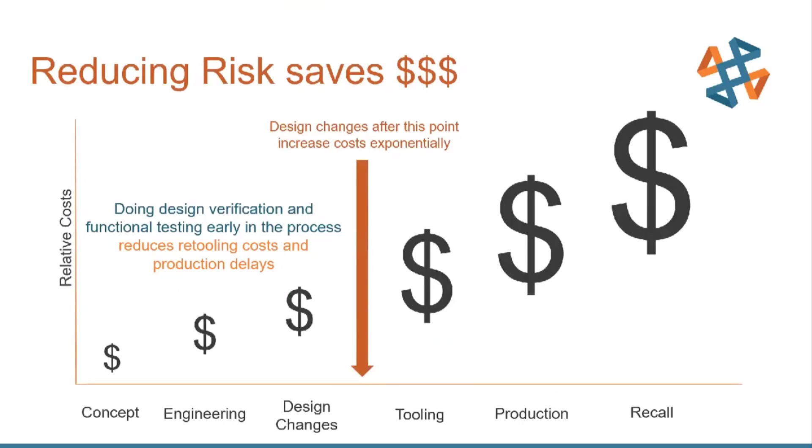CAD, or Center for Advanced Design, is a firm of design engineers specializing in creating complex surface geometry for the plastics industry. CAD's goal is saving time and avoiding mistakes, both of which saves money. They're using the Stratasys F370 to quickly make design changes and often print multiple iterations before any tooling cost is incurred.

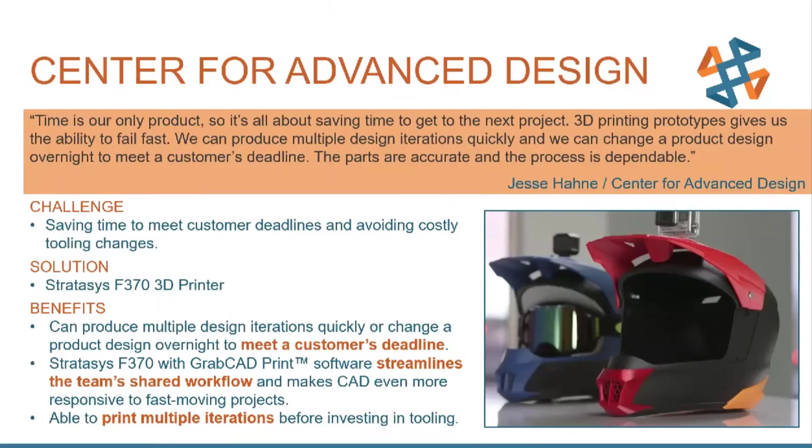See their motocross helmet, which is designed to attach a GoPro camera to the visor. OtterBox is the number one supplier of smartphone cases in the US. Their challenge is keeping up with the latest versions in the cell phone market. To keep up with the ever-changing consumer items, OtterBox uses the J750 3D printer to create the exact size, shape, and color of their designs.

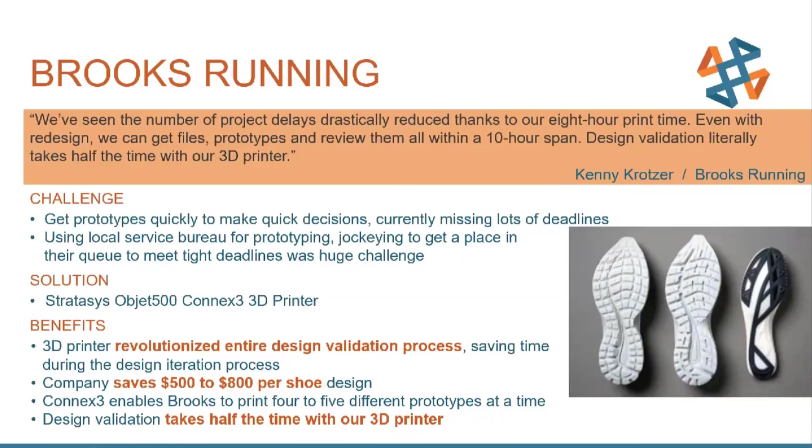Prototypes went from days to hours, enabling a 67% time to market savings. Brooks Running is a US-based footwear company using a Connex 3 PolyJet printer to validate design at half of the time. This increased pace saves $500 to $800 per shoe design. In the photo, you can see two shoes that look similar, but with different tread designs. 3D printing lets them evaluate multiple iterations very quickly.

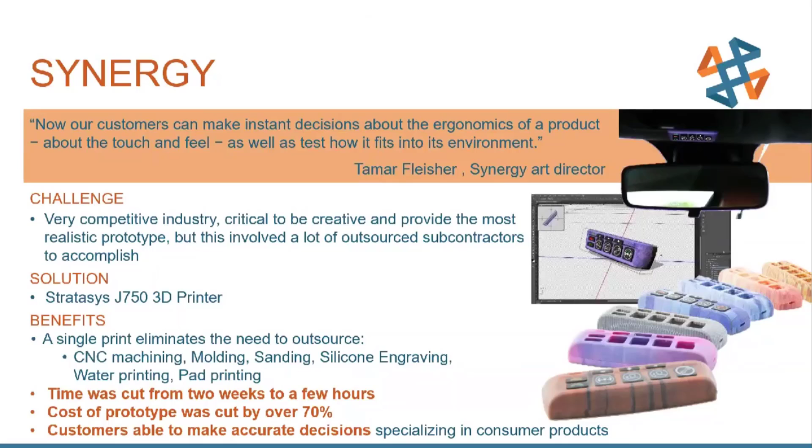Synergy is an R&D center for product development that specializes in consumer products, providing industrial design, engineering, and rapid prototyping services. The J750 meets all their needs of touch, feel, ergonomics, and environmental testing. Multiple machine operations are eliminated, from 2 weeks to a few hours, with a cost savings of 70%. Shown in the picture is the design for an automatic crash response system that can be customized for the car interior or customer preference. Let's look at a quick video of that.

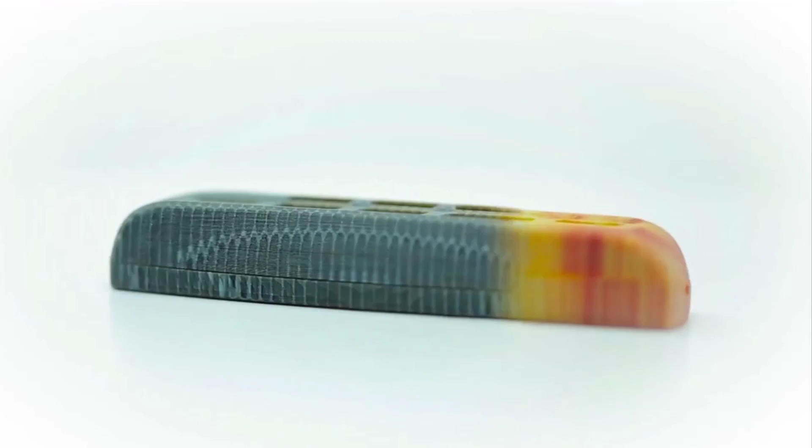Synergy is the R&D center for product development, industrial design services, engineering services, and rapid prototyping services. We specialize in consumer products. We really understand the process from the initial sketches to design to production. Each stage, we understand exactly what needs to be involved. The competition in product development and product design is very high today. To sell a consumer product, you need to be very smart on one hand, but on the other hand, you need to be very, very creative. The first time an entrepreneur sees his idea and feels it in his hand, it is a crucial moment. We need to give him the most realistic prototype.

Basically, to build a prototype like this takes a lot of time and a lot of subcontractors. But today, with the Stratasys J750, you can do everything on the spot. We designed an automatic crash response system, which is actually this control panel.

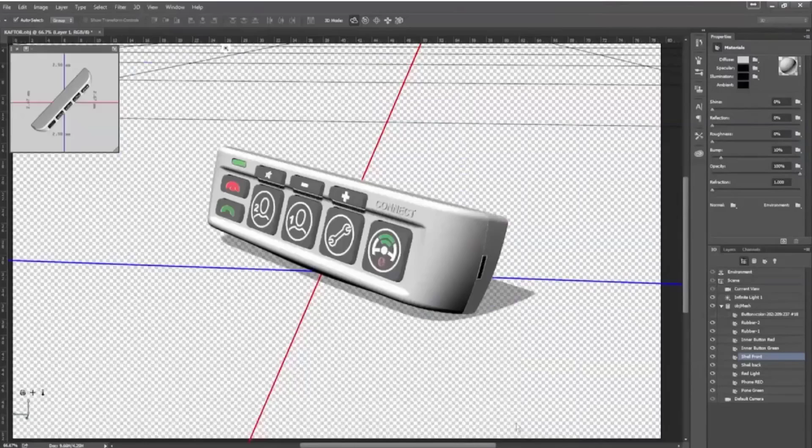Now, when I come to design a new product, I have total freedom. I can take a CAD file from SolidWorks, for example, just throw the texture and the graphics in there, and I know that in a few hours I will get a prototype that I can touch and feel, even translucent materials if I want to create light transfer, to see an LED behind the screen with a soft touch, with rubber feel.

Even to show the electronic engineer how the circuit is going to be implemented inside. This allows my customers to take very accurate decisions about the future of the product.

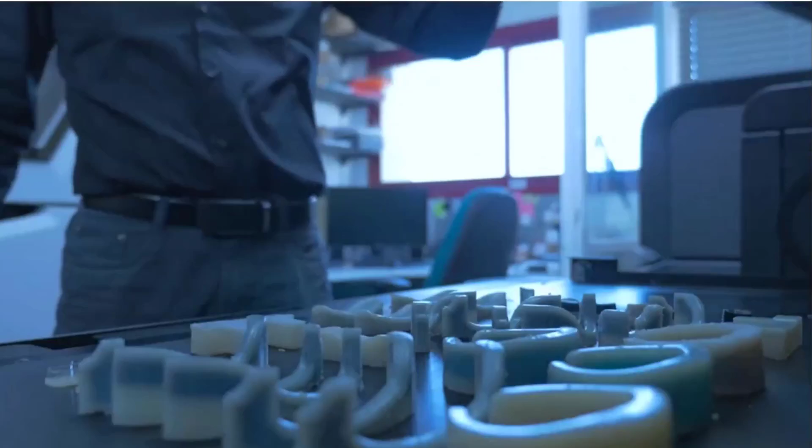We can combine from each department and assemble it together in one machine with no extra cost, with no extra effort, on the same tray overnight for different clients, and everybody's happy. They don't believe that this is coming out with full colors, full textures, full gradient. It's a game changer. The J750 is a breakthrough solution in product realism. It's also very efficient and very versatile.

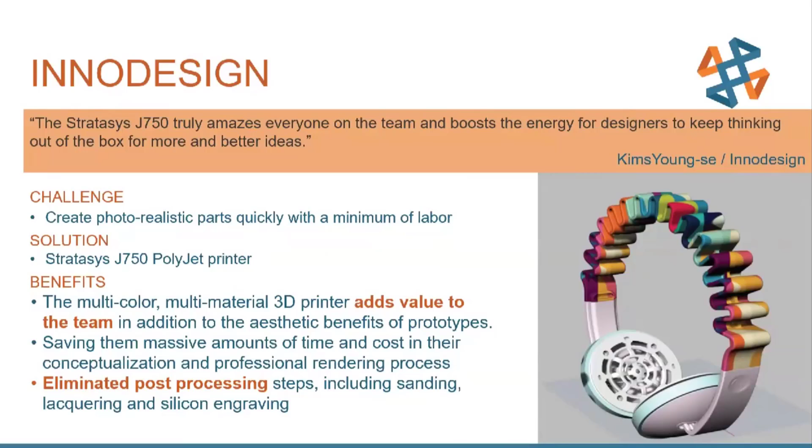InnoDesign was founded in Silicon Valley in 1986 and is known for adding unique touches to the designs of major consumer customers across the globe, such as LG Electronics, Samsung, and more. Here, they use their J750 printer to print a full-color ribbon candy style headphone. This innovative model has won several design awards.

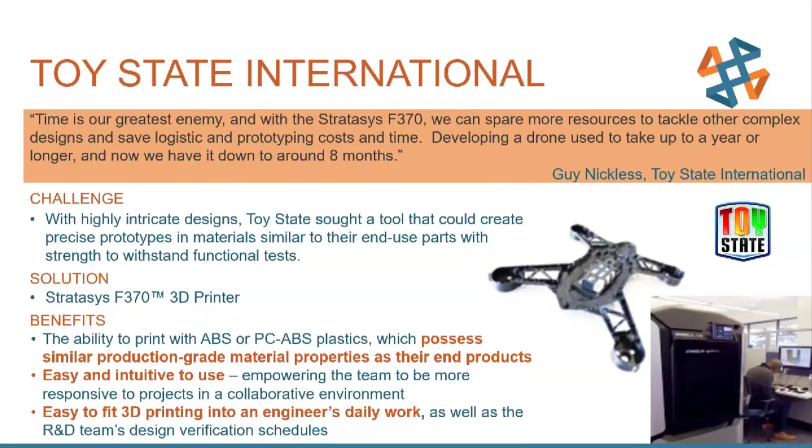Toy State International launches more than 200 new toys each year aimed at preschoolers, young children, and hobbyists. Designing the drone shown here was 25% faster, allowing more time to tackle more complex designs. The Stratasys F370 allows them to use materials that are similar to their end-use product, and the ease of use allows it to be incorporated into an engineer's daily routine.

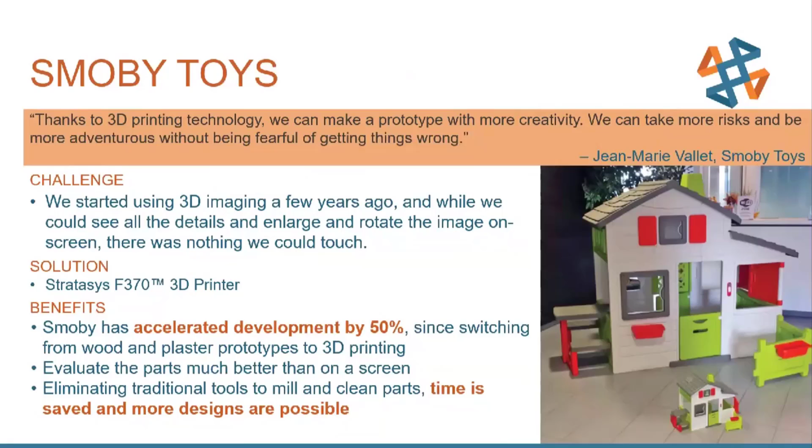Smoby Toys have products ranging from bath toys and toys that encourage motor skills to outdoor slides, playhouses, tricycles, and more. The demand for new designs keeps Smoby's FDM 3D printer running more than 18 hours every single day. Printing parts with the Stratasys F370 allows them to have a tactile feel of the design rather than just a screen view on a computer monitor, and still accelerate development by 50%. In this picture, you see a smaller FDM prototype that stands in front of the final full-size outdoor playhouse.

Thermos is an iconic brand producing insulated food and beverage containers. They maintain leadership by continually improving weight and usability. Thermos uses both FDM and PolyJet technologies to create highly tactile prototypes in just minutes or hours instead of the 3 to 5 days they typically used to take. This produces a significant cost savings of 80% in their development cycle.

Unilever is an international consumer goods company producing food, beverage, cleaning agents, and personal care products. Their Connex PolyJet is used to make plastic injection molds to create short-run test parts out of the final molding material. Prototype costs are decreased by 20%, and design changes are 50% faster, with an overall design cycle reduction of almost 40%.

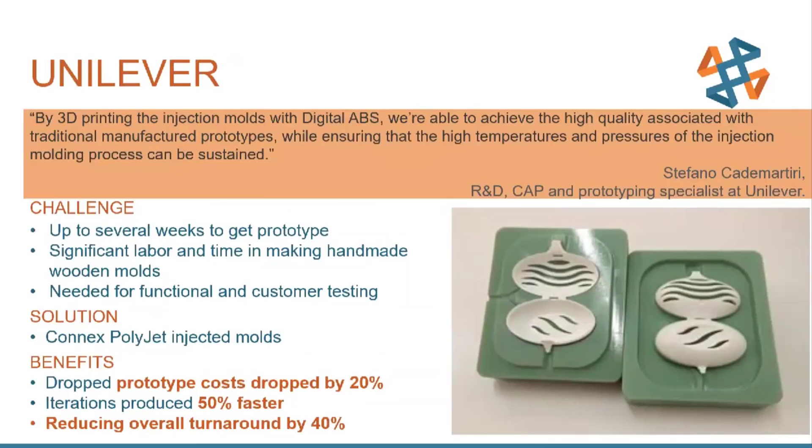So these are just a few of Stratasys' consumer customers. Chances are extremely good that you have already used at least one of their products this morning that was developed using 3D printing. So as you can see, Stratasys is the expert that the experts trust.

So how does Stratasys become the expert? By creating a portfolio of equipment and materials that meet the needs of experts, let's talk about the two Stratasys technologies that make everything possible, starting with FDM.

Stratasys invented the FDM, or fused deposition modeling technology, in the late 1980s. FDM remains the most common method of 3D printing today for both hobbyists and industrial use. FDM takes heated thermoplastic filament and extrudes it layer by layer to create a three-dimensional part. Stratasys uses two print heads with two different materials.

One print head is dedicated to the model material, while the other has a support material. Most hobbyist machines use the same material for model and support, making it difficult to separate support from the finished part. Stratasys often uses dissolvable support material to make it even easier and faster to get the finished model you need.

FDM machines can build in 5 thousandths, 7 thousandths, 10 thousandths, 13 thousandths, or even 20 thousandth inch layers, depending on the material and the machine. If you need good detail, a 5 thousandth layer will do the job. And if you need your model quick, 20 thousandth layers will meet your need for speed.

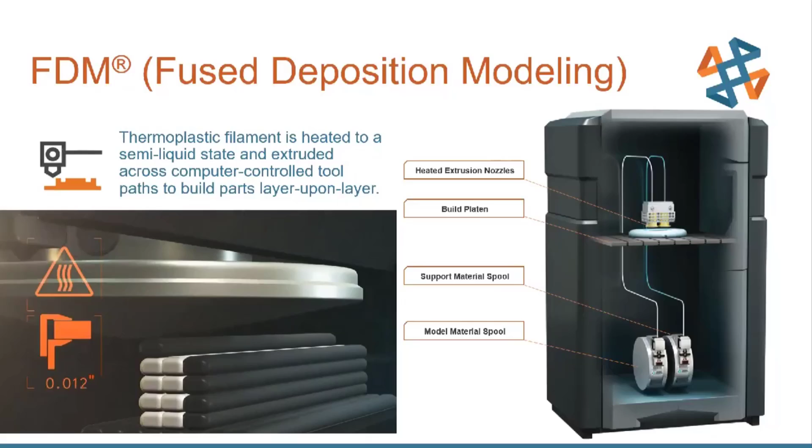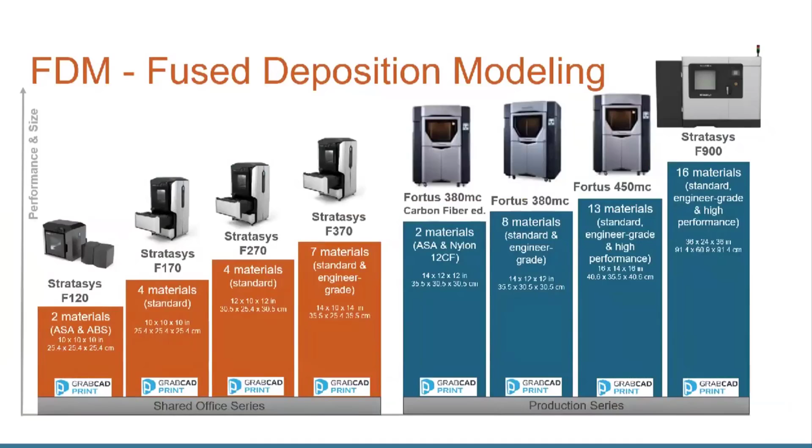The shared office series is made up of the F123 series with different build envelope sizes and material options. The production series increases build size as well as material options. All FDM machines use GrabCAD print software to prepare jobs, while the F370 and above can also use Insight Advanced software to control each layer individually.

Looking at FDM materials, let's start with thermoplastic elastomer. Stratasys offers a TPU with a 92 Shore A value. For automotive use, such as protective rubber boots or texture cover for a brake pedal, parts can be built for design verification without investing in any tooling.

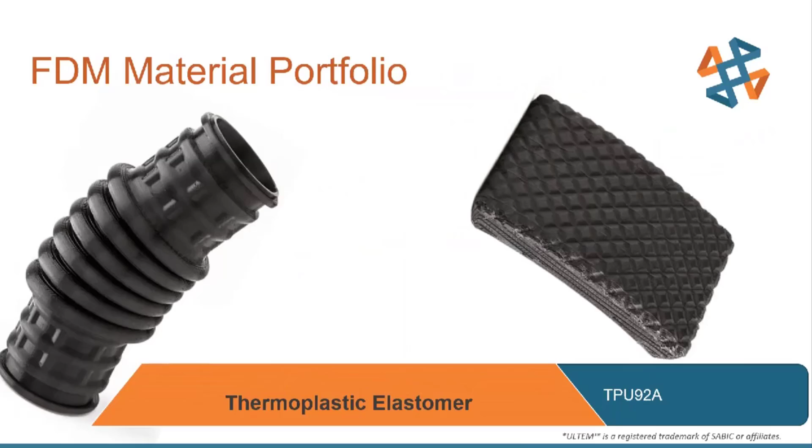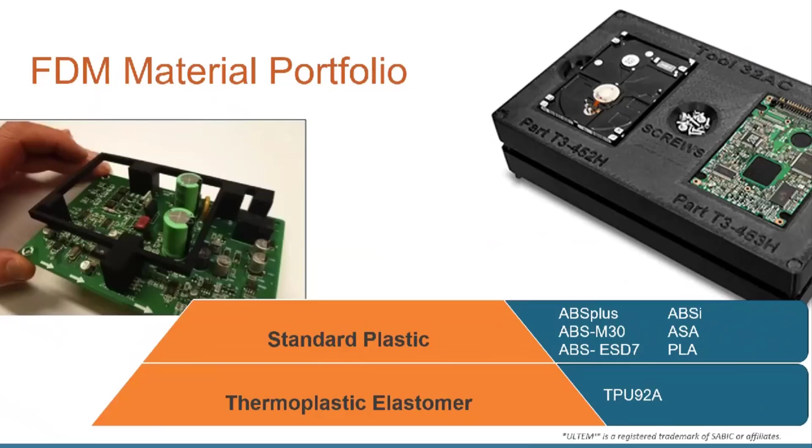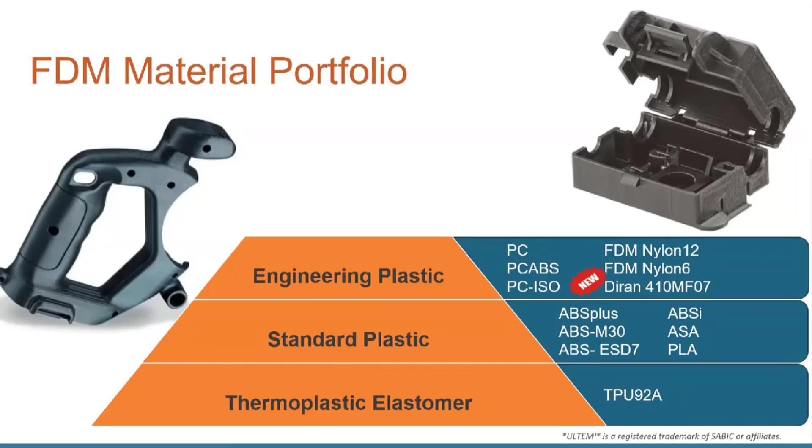With engineered plastics, Stratasys offers resilient polycarbonate with PC blends and a couple of nylon choices. Shown here are a couple of samples in the consumer market: a PC-ABS saw handle and a nylon 12 battery box. Also new to the lineup is Diran, with mechanical properties of Delrin, now available on the Stratasys F370. Delrin is mostly used in tooling applications for its dimensional stability, lubricity for wear resistance, and non-marring surface texture.

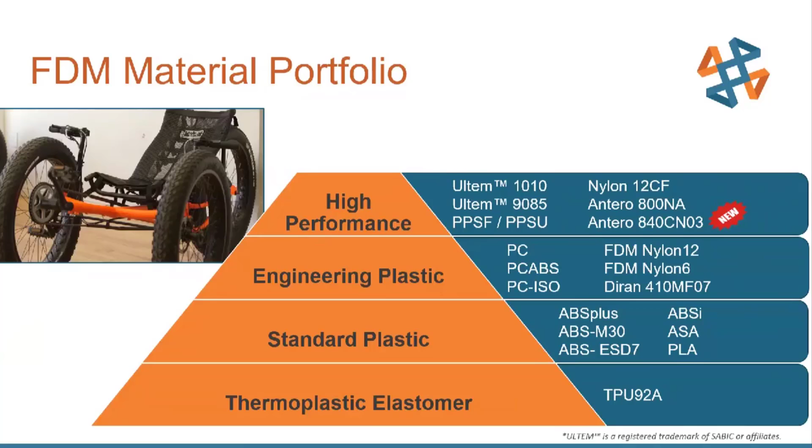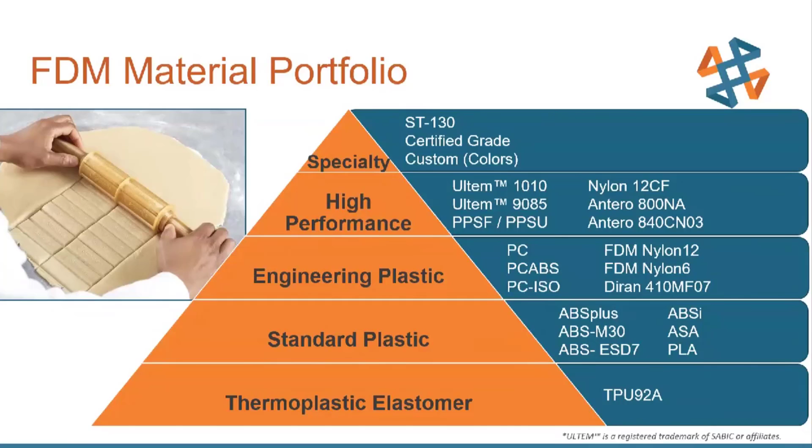Now let's take a quick look at PolyJet. If you have an inkjet printer at home, you may be more familiar with PolyJet technology than you think. PolyJet uses the same kind of print heads that your home printer would use. The two differences are that Stratasys incorporates a Z-axis, so the ink can be built up layer by layer, and they also use a specialty photopolymer ink.

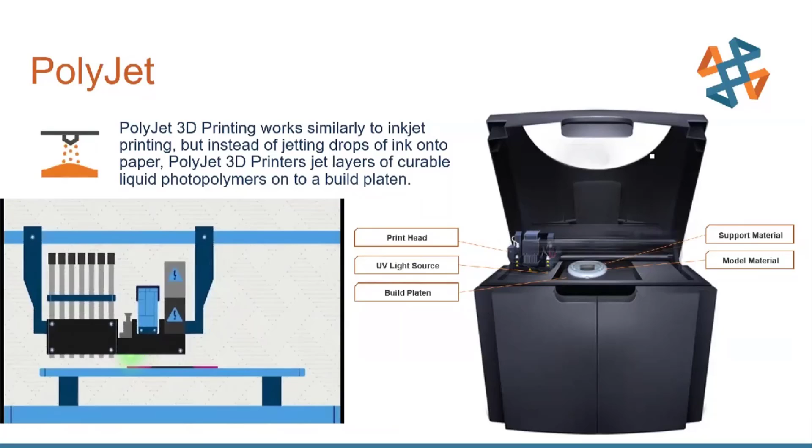Photopolymer materials are hardened with UV or ultraviolet light. Like FDM, PolyJet technology also uses a separate soluble support material that allows you to just wash away the support from your model. Models can be printed from 36 micron layer thickness for draft mode all the way down to 14 microns, or less than 0.5 thousandths of an inch, depending on machine and material combinations.

The Easy Concept model series is made up of machines that can run several materials, but they do not support the mixing of materials for mechanical properties or blending materials to create different shades of color. When you move up to the Connex3 machines, now you can mix up to 3 model materials to define specific colors or to create different mechanical properties.

Moving up to the new Stratasys J835 and J850 printers that are loaded with 8 different materials, including the support material, will yield more than 500,000 colors and blending of multiple materials for specific mechanical properties. In addition, almost 2,000 colors have been Pantone certified.

And now introducing, we have a new digital anatomy printer specifically made for the medical industry with new materials for medical realism. Most machines use GrabCAD print software to prepare jobs just like the FDM technology, minimizing a learning curve to own both technologies. Let's take a quick video about the Stratasys J850.

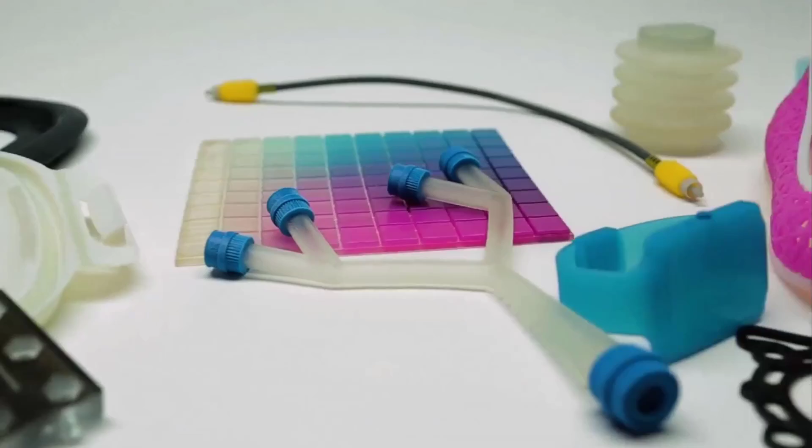Creating 3D printed parts or prototypes with simulated rubber isn't a nice to have, it's a must have for designers and engineers, particularly if your prototypes are for applications in industries such as consumer goods, consumer electronics, automotive and medical devices. So this is the new Agilus 30 rubber-like material family from Stratasys.

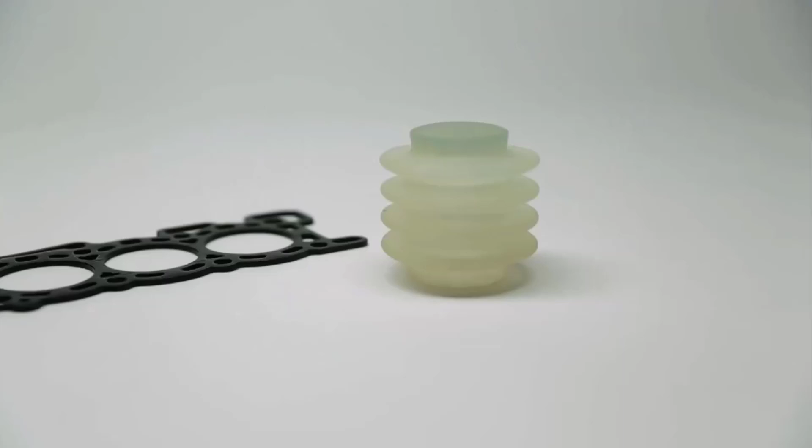It's available in black and translucent. And it provides superior tear resistance of up to 6 to 8 kilograms per centimeter, elongation at break of up to 220 to 240%, and tensile strength of up to 2.4 to 3.1 megapascal, which makes it ideal for prototyping delicate designs or parts that undergo repeated flexing and bending.

The material features an improved surface texture that's not only easier to clean, but also looks and feels more like rubber. And of course, because it's PolyJet technology, you can create a whole range of digital materials with differing Shore A values, shades, and colors.

So here's the Agilus 30 combined with Digital ABS material for simulating tough parts with rubber surrounds, overmolding, and really good non-slip surfaces. Or you can combine it with the rigid material to create living hinges and polypropylene-like performance. Also, you can use it with Vero Cyan, Magenta, or Yellow to produce a whole range of digital materials with flexible colors and textures such as these.

So if you need professional prototypes that stand up to all your design verification requirements, the Agilus 30 family is the material choice for all-round rubber-like performance. Thanks for watching, see you next time.

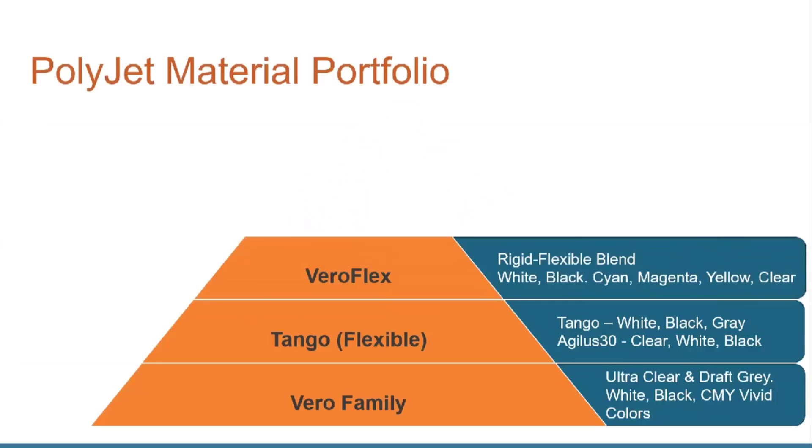Next is the VeroFlex material, specifically made for the consumer eyeglass industry. VeroFlex is stiffer than the 30 to 95 Shore A range available with the Agilus family, but still more flexible than the Vero family.

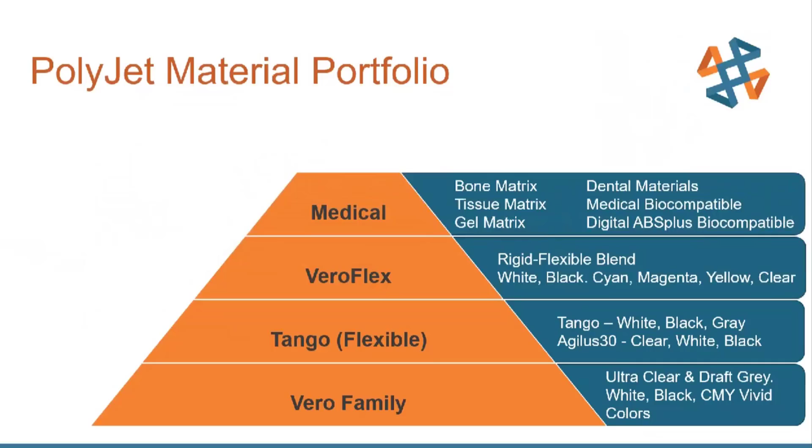For the medical market, we have offered biocompatible and dental materials for quite a while, but new is the bone matrix, tissue matrix, and gel matrix materials, exclusively for the new Digital Anatomy printer. These materials have specific build parameters to create the structure, texture, and feel for anatomical simulation and diagnostics.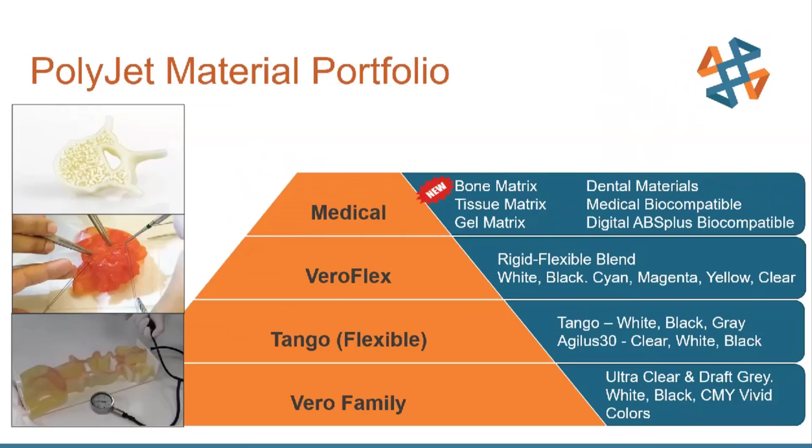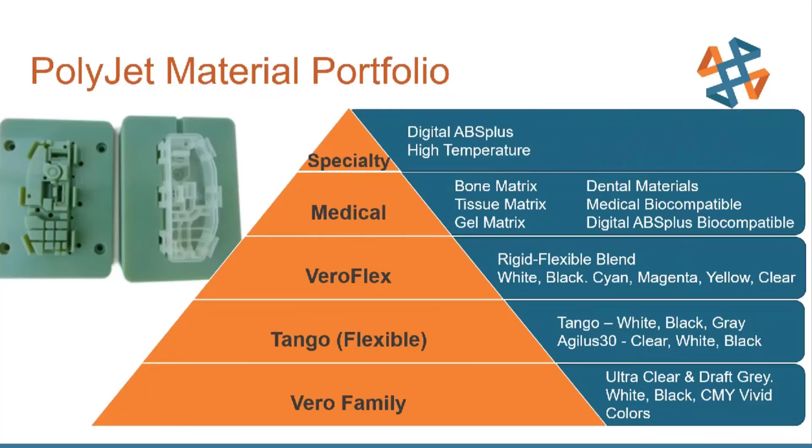And lastly, let's take a quick look at some of the features that the GrabCAD Print software that runs these machines is capable of. So it works with most FDM and PolyJet equipment that Stratasys offers.

It can import native CAD files, so whether you're working with SolidWorks, CATIA, Inventor, etc. If you're familiar with the 3D printing process and you're constantly converting files to STL, you no longer need to do that. You can correct or repair any mesh problems if you're importing mesh files.

You can estimate material usage and build times. You can manage assemblies, separate or group. So if you have a SolidWorks assembly, for example, you can just import that whole assembly. You can ask the software to break the assembly down and just place all those individual parts on the tray, or you can ask for it to remain an assembly.

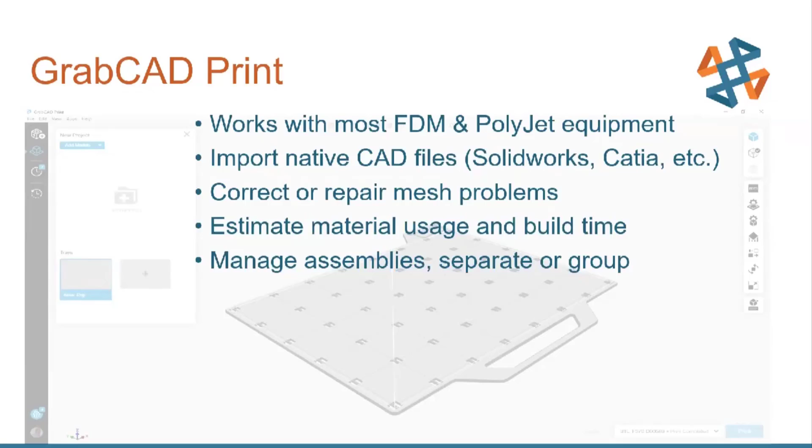You can select PolyJet colors and durometers. So if you're interested in assigning Pantone colors to a logo or something like that, all that can be done in that software. You can select the FDM build styles, support angles, and more.

So whether you want the part to be solid or you may want it to have a sparse infill to create a lightweight part, we have advanced FDM setting parameters that'll allow you to control those kinds of settings, whether a part is solid or sparse, depending on different features within the part. So if you have a section of a part that's seeing a lot of load and breaking, you'd want that solid, but it would be wasteful to print the whole part solid. Advanced FDM can do that for you.

And then we also have Insight Advanced software that can be launched from within GrabCAD, which will give you individual advanced control over the FDM toolpaths. And that concludes our presentation.